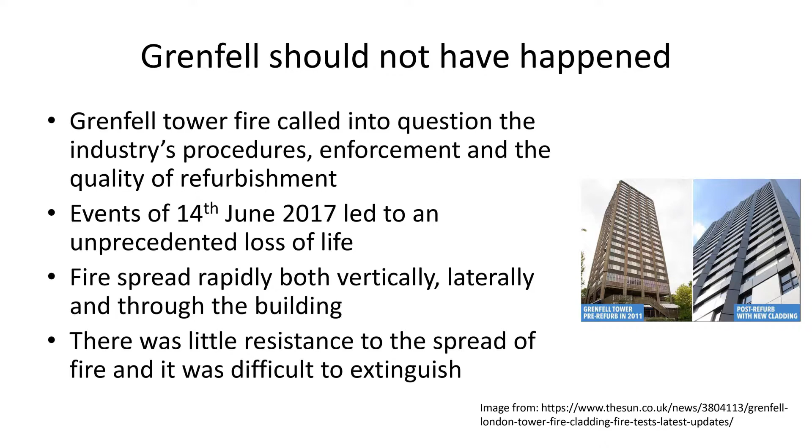So a point we should first note is that the fire within Grenfell spread vertically and laterally. And notwithstanding what is happening with the inquiry, which many people are speculating on, there are a few things we can see with Grenfell. We can see that the fire both spread up the surfaces of the building and then across and through the building.

So there was neglect in many parts to what happened during the refurbishment and the compartmentation that exists within the structure. The other thing to note is we've not demolished the structure. It's quite clear that it has a structural integrity that made buildings like that, and buildings that we still have, worthy of construction and retrofitting. But what we must also do in the future is ensure that they do have the necessary fire regulations, fire remedial action in place to ensure that they're safe.

So if it had been a risk to health and safety in the structure, we would have been demolishing that now. But it is still standing, and whether it gets demolished in the future or not remains to be seen. But what we should note is that these buildings are worth refurbishing if we do it properly.

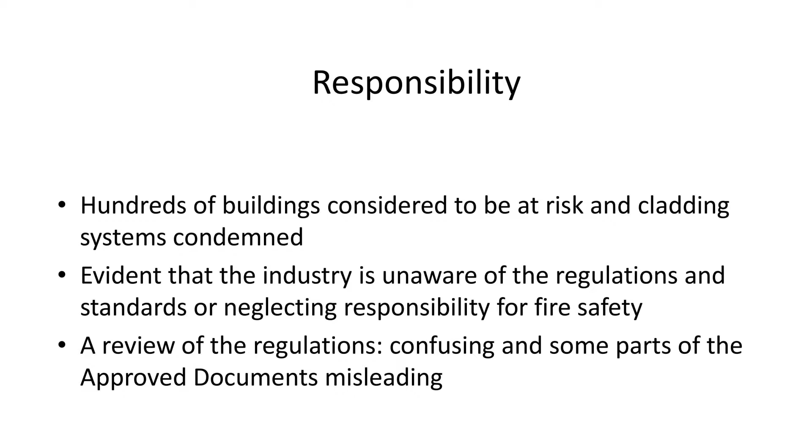So hundreds of buildings are considered to be at risk, and the cladding systems have been condemned. We've seen many buildings not around us. We've seen student properties no longer occupied because we can't get the indemnity for the insurance. So we're seeing a period where we're actually trying to come to terms with what we should be doing with buildings of this type. It's also interesting to note that aluminium composite cladding materials in the US are restricted above 22 metres high, and also above 15 metres are not permitted under the Scottish regulations.

This is really some of the notes that John would have presented, but just as basic principles, for combustion to take place we need 3 essential ingredients: fuel, air or oxygen, and the initial heat to allow the combustion to take place.

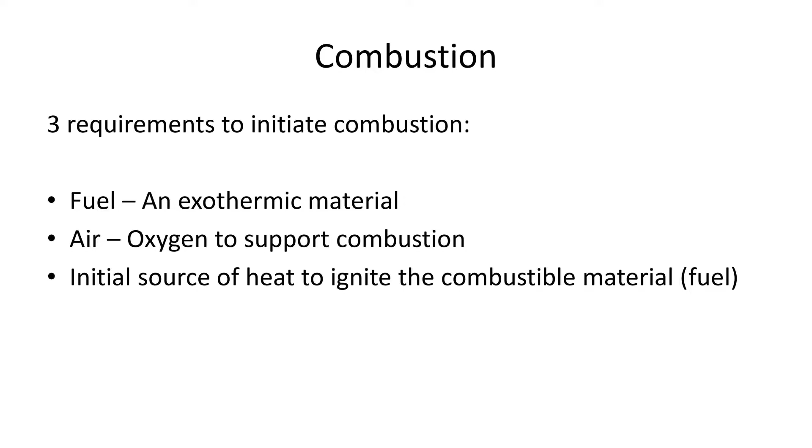So the fire tests have evolved over a number of years, and we've gone from testing individual materials and looking at the material and how much heat is produced from combustion. We've looked at surface spread of flame, and we've also looked at the chemical species produced from the fire. And from that, we've gone from the single samples to really what is the research that's led to the latest philosophy of testing that the BRE have adopted.

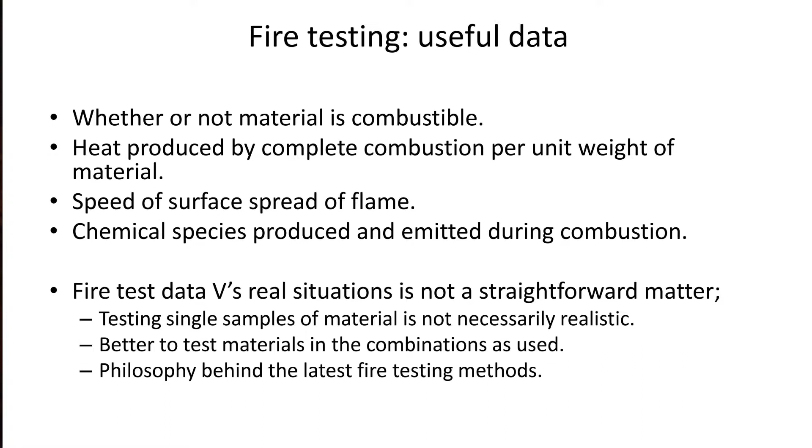But researchers for a long time have been recommending that we should be replicating the conditions of the full structure in order to see whether or not the risks of cladding systems or materials on buildings burning is real. Probably what is interesting when considering the nature of the materials that we're using and whether or not there are risks are the actual sort of principles of fire and how fire ignites.

So just before I came here, I was having a number of discussions with John Sturges, who is unable to get over with us, and other chemical scientists that we've got at Leeds Beckett. And we were talking about the fact that I was coming over here and going over some of these notes. But the Navier-Stokes equation is basically the equation which gives us the properties and things that happen during combustion with the gases.

So should any external material catch fire, we know that hot gases are going to be produced by combustion. These will rise due to natural buoyancy. And whenever a fluid or liquid or gas contacts the solid surface, a boundary layer of the fluid attaches itself to the solid. So that's when we've got a material such as your polyurethane or the aluminium, which just starts to burn, and we've got this boundary layer of gases or fluid, which is then combustible.

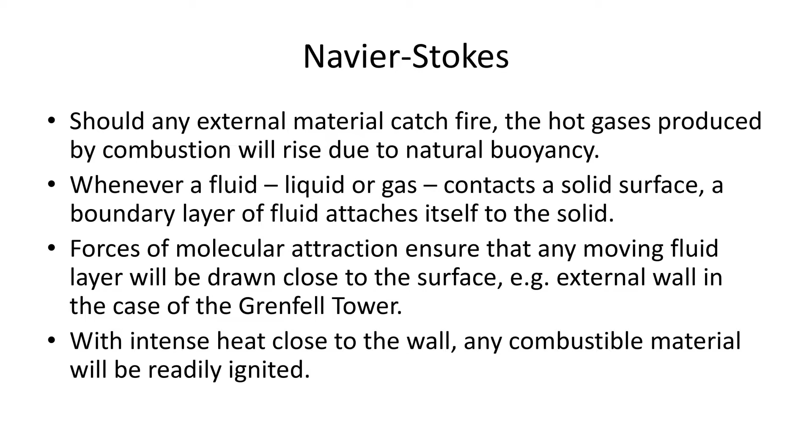So as a result of forces of molecular attraction, Van der Waals forces, which are distance dependent, interaction between the atoms and the molecules creates this attraction due to the gases being produced by the combustible material. What is also interesting is that as a result of the fire, the volatile organic compounds burn, and the gases given off end up being a reducing agent which can strip the oxide layer off things like aluminium cladding. And once that oxide layer is stripped off, aluminium and other materials are reactive materials, potentially melting or aiding the combustion.

So we should pay much more attention to the materials that we're choosing and what happens to them during combustion. And at the moment, many of the tests that we're conducting through the BRE and other tests are not necessarily going to pick these features up. So they are going to test them to see how they perform or how the fire spreads. But there are some things that we must learn from Grenfell, both in how we move forward and how we put materials together.

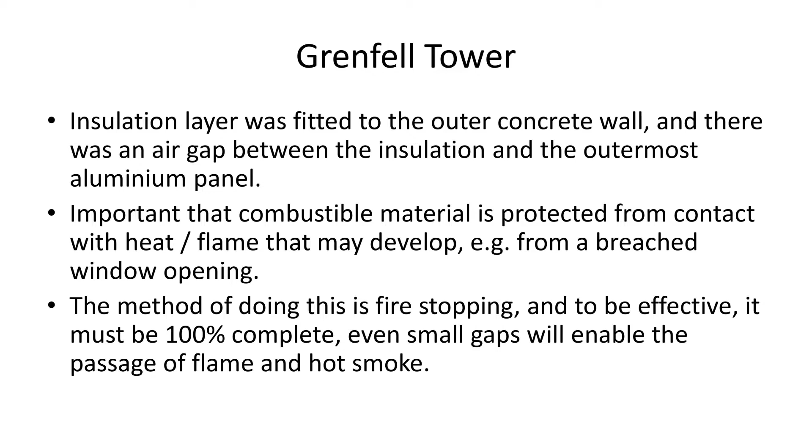So in Grenfell, getting back to the construction, we got an insulation layer that was fitted to the outer concrete wall, and there was a gap between the insulation and the outermost aluminium panel. So vitally important is that the combustible material is protected from contact with the heat or the flame, which it was not in the Grenfell situation. So the method that we see for doing this is by fire stopping, or filling the gaps with non-combustible material.

Now there are some photographs of Grenfell which we will have a look at on the next slide. But one of the things that was pointed out to me is that there were some inadequate construction details on the refurbishment project. And these construction details are probably typical of most refurbishment contracts. So when the design's produced, there's a lot of unknowns with the structure. And somebody said to me that there was no detail for the fixing around the cladding. Well, clearly this detail that we've shown here was not how the actual cladding was fixed, how the sills were fixed, because there's no fixing shown.

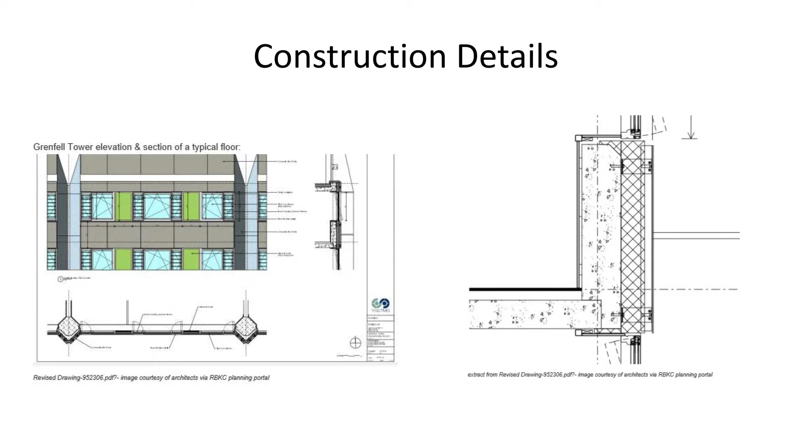So when I was showing details like this and we're critical of them, actually if we were constructing this, we would normally be having discussions on how we fill these gaps and how we address these on site, and looking at the details depending on actually how the structure lines up with the cladding, the proposed cladding. What we have to do in future is ensure that there are adequate seals between the sills and the cladding materials, and the fixing details are clear.

I put to you that practice to this on other buildings is probably common. So certainly when we test our buildings and we do building physics for thermal performance, we often get air leakage or we get smoke passing from one building to the other. That would not happen if fire barriers were in place. So we know that both on the domestic building stock and on commercial building stock, this situation probably arises in most of the buildings that we've built, but can't go on in the future.

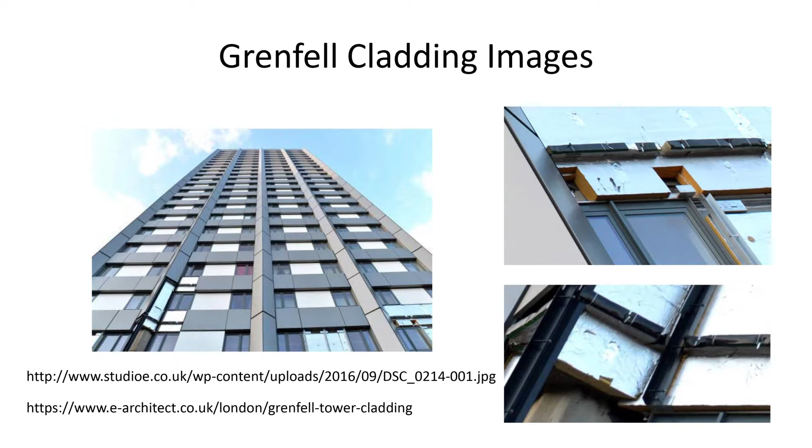The other problem that we've got in terms of actually tackling this fire is that once the fire took hold, it was a combustible material, but there's actually a low thermal diffusivity on the insulation, which means it actually resists the passage of heat, which has actually prolonged the burning. Because there's obviously a lot of fuel there, there is the potential to keep that fire going, but it actually becomes a source of combustion that is going to take place over a long period of time and almost protect itself from being extinguished. So the material being combustible and insulation material brings some problems in its own right.

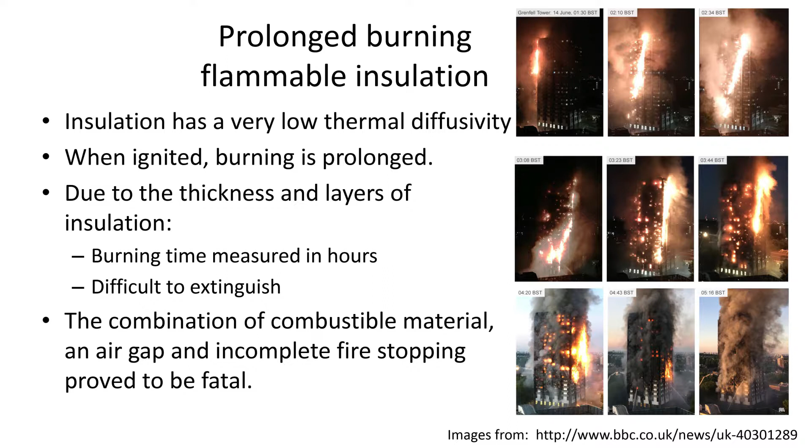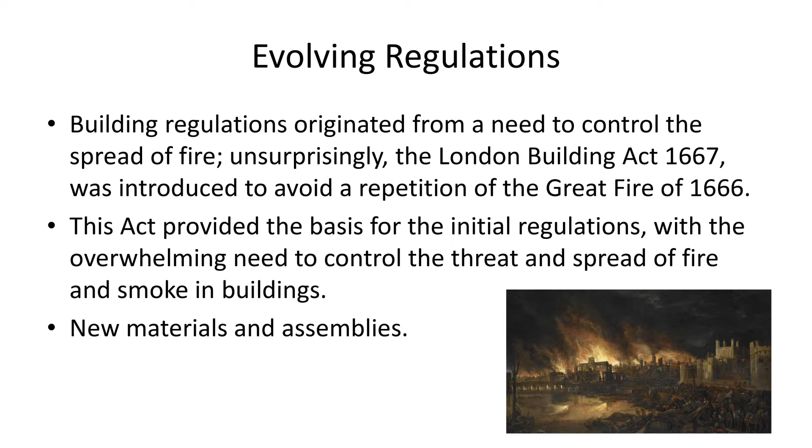This is why, going back, the standards, the building regulations have always been upheld as ones which place fire first. It is the reason that they came into force. So under the London Building Act, as a result of the Great Fire of London, we brought the regulations in place. So worldwide we're regarded as people holding some of the highest standards in our regulations and standards. However, we have let that slip.

I was asked to do a review for the CIOB's Research and Innovation magazine or journal, and I was asked to go through some of the regulations and suggest why the industry had got to a situation where it had. And it was not until this point that we'd really examined the building regulations in any detail. So when you look at Approved Document B, bearing in mind I'm an academic, I have access to all of the other subsidiary documents, the guides and the other standards that you refer to.

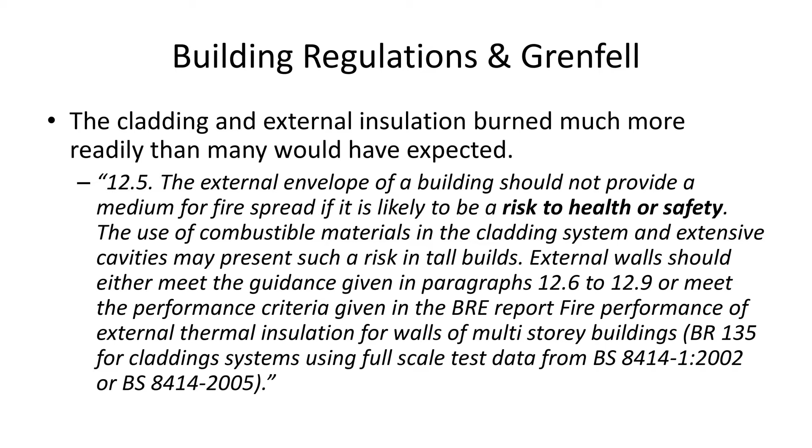I found it extremely confusing, extremely time consuming to try to untangle what certain very pertinent and vital terms meant within the regulations. And I put it to you that as a professional who's currently in practice, you don't have the time to go through the regulations and to do what I did. I did it specifically as a study, and it probably took me about a week of half a day every day going through the regulations and accessing documents to realise that there were some conflicting terms and that it just wasn't possible to get easy interpretation of the regulations.

Contrast that to 25 years ago when I came as a student studying construction. The building regulations were relatively simple, straightforward documents that most people could understand. They were relatively fit for purpose. We have a very disparate industry, so people come in and enter the industry without much experience and training, and yet we expect them to operate to high standards.

We do need to move back to regulations that have clarity and serve the purpose that they were intended, which is to provide good guidance. One of the other challenges is a lot of the other documents that I accessed cost between £80 and £200 per document, and I must have accessed 20 documents. So is it even reasonable that we're actually requiring somebody to access potentially £1,000 worth of documents in order to arrive at a definition, not even an understanding of what we should be doing?

The point that I would actually try to make is that under the regulations we're all responsible to ensure that the risk to health and safety is minimised. So this is the key point that I would like to take from the regulations. The external envelope of a building should not provide a medium for fire spread if it is likely to be a risk to health and safety.

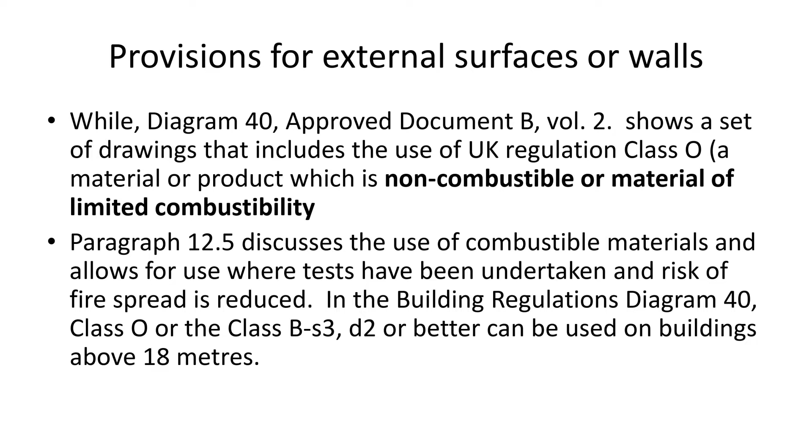So some of the points of contention are the definition of what is meant under Class O under the building regulations, or the Class B-S3-D2, which Martin and Jenny will go into more detail later. But coming into this as a building construction expert and not necessarily a fire expert, I was trying to understand what the two definitions meant.

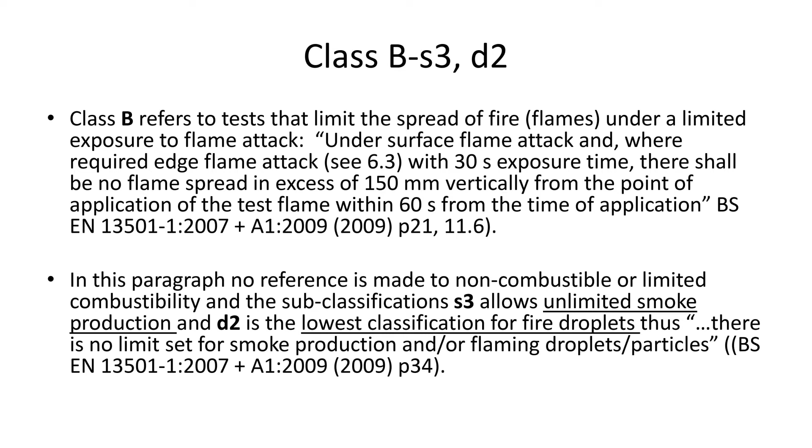So in terms of the B-S3-D2, the S3 sub-classification allows for unlimited smoke production, so that gives us free range. And the D2 is the lowest classification for flaming droplets. Thus there's no limit set to the smoke production or flaming droplets from that current standard. So we're talking about something which is of limited combustibility, which can produce as much smoke as it wants and drop fire on the rest of the structure. So the standard there, for a general interpretation, is very low.

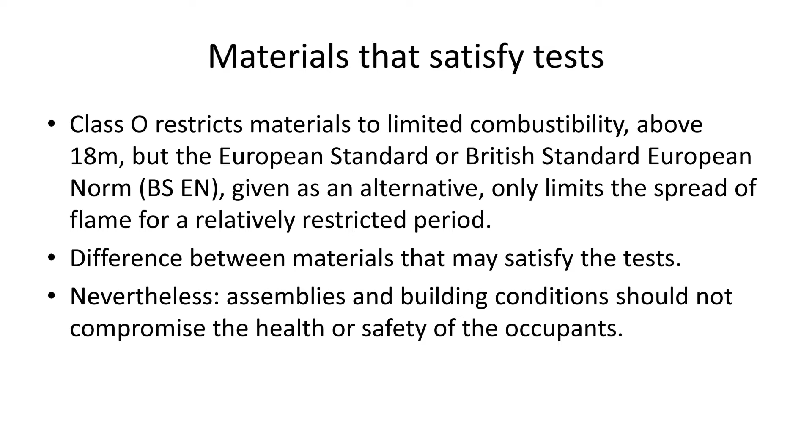So Class O restricts materials to limited combustibility above 18 metres. But what the British Standard European standard gives as an alternative only limits the spread of flame for a restrictive period. So the spread of flame, if I can refer to my notes, for the non-combustible test was under surface flame attack and, where required, edge flame attack, cross-referring to another section,

6.3, with 30 seconds exposure time, there shall be no flame spread in excess of 150 millimetres vertically from the point of application of the test flame within a further 60 seconds from the time of application. So what we're referring to is an initial exposure to fire for a 30-second period on a sample of material, and when that flame's been removed, that spread of flame won't increase over that 150 millimetre sample. When you look at that as a test for non-combustibility, that doesn't sound to be a robust test.

So, in my view, if we go back to the first part of the regulations, where we must manage the risk of spread of flame to reduce the risk to health and safety of the people, whilst we have these tests, these are tests to guide; we still should be looking at what happens in buildings when we put these materials together.

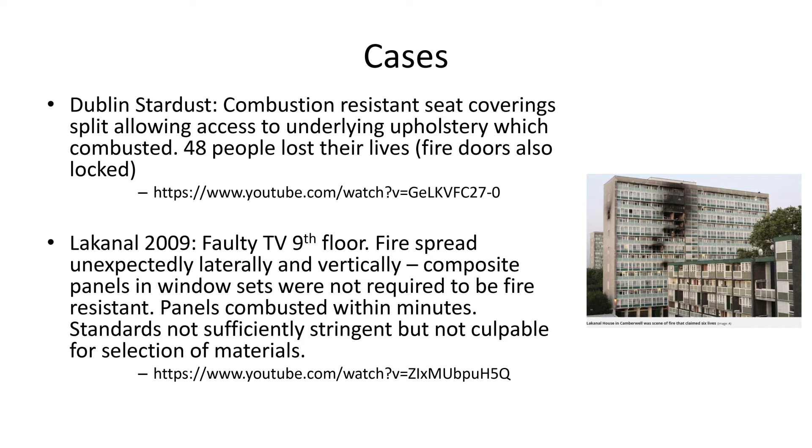We've obviously got to pay a lot of care to the refurbished projects to ensure that the buildings have sufficient compartmentation, that the services are protected. We can't have fire spreading through the buildings internally. Equally, we have seen a lot of fires in Dubai where the fires are spreading up the surface of the buildings.

There's been hardly any, I can't say for certain, but I don't think there's been any reported loss of lives in these fires. And it's mainly to do with the internal structure of the building. So the compartmentation within the new buildings has been fit for purpose, as in the combustion has not penetrated back into the building beyond the surface apartments. So there are plenty of buildings, including the Torch Tower, which happened after Grenfell, where the fires can be seen stripping up the buildings.

In some of these buildings, occupation remained while the fire was taking place. There are accounts that one New Year's Eve on one of the buildings, I think it was the Sulafa Tower, they carried on having the New Year's Eve party while the fire was taking place. I certainly wouldn't have been staying in the building, because you don't know where the building's been compromised. We don't have full control of all the people on site and what they've done. So I think we should be paying much greater attention to detail in terms of the products that we're putting together on our cladding systems.

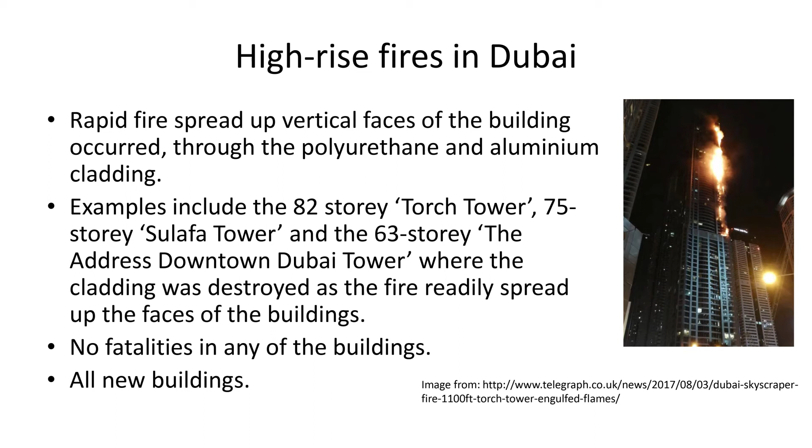So, as a general guidance, I think the building regulations are confusing, and this has been something I've written about publicly and put to parliamentary inquiries. There is a lack of clarity. However, that doesn't take us off the general requirement that we should be protecting the health and safety of the people within the buildings, and we should be resisting the spread of fire across the surface and through the buildings.

The buildings that we've got in the UK generally are structurally sound and can be refurbished adequately, but we must ensure that we've got fire stops properly fitted, that the building work is properly checked. So we've got to have more robust systems for ensuring the work is taking place. I know that's not easy, because I've had work done recently in my own house by people I trusted, and when I've looked at it, it's not been done right. They clearly didn't have the experience that I thought they had.

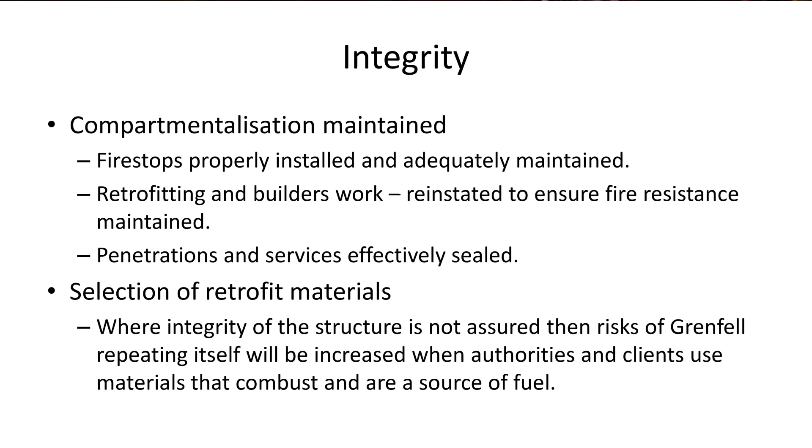We do put a lot in terms of actually ensuring people are competent, and probably our checks for competency are not always adequate. We must be checking the works that we've had done, certainly the builder's work and any reinstatement. You've got to be paying particular attention to Grenfell, to Lakanal, and making sure that materials that we're putting on the faces of our buildings are non-combustible and sufficiently restrict that spread of flame so that we don't get a situation such as Grenfell reoccurring.

I've seen Martin's presentation before, and I think it does offer some insight and probably does provide us with products that are certainly robust for most future eventualities, and certainly more robust than the aluminium cladding structure of Grenfell. Thank you for your attention.